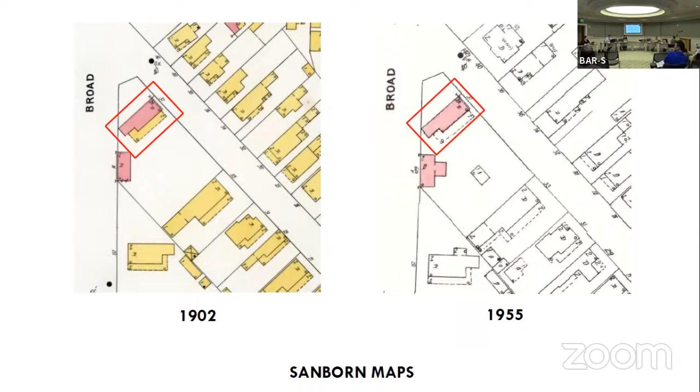And some Sanborn maps showing the history of the structure. We'll turn it over to the applicant.

Good evening, I'm Julie O'Connor. I'm here to do the presentation. After the city shut the project down, Buzz reached out to me and asked me to help navigate the BAR process and do the presentation for him so he didn't have to speak in public. So that is why I'm here.

So Frankie, if while I'm talking you just want to go through the photos, there's no need to worry about that. So the project started with a renovation of the building and a repointing of the brick where the mortar was failing. And as Mr. Morris was doing this work, he realized that there was a significant bow on the front elevation of the house.

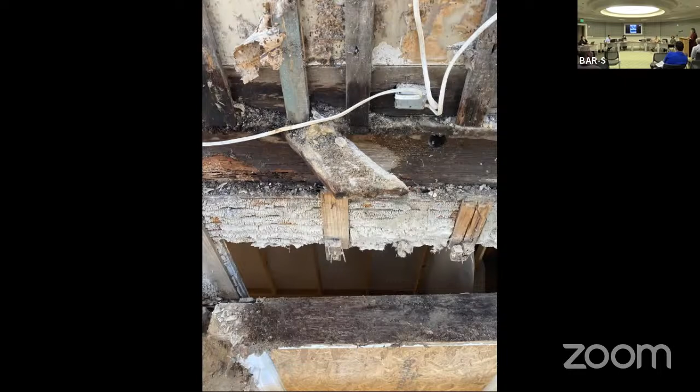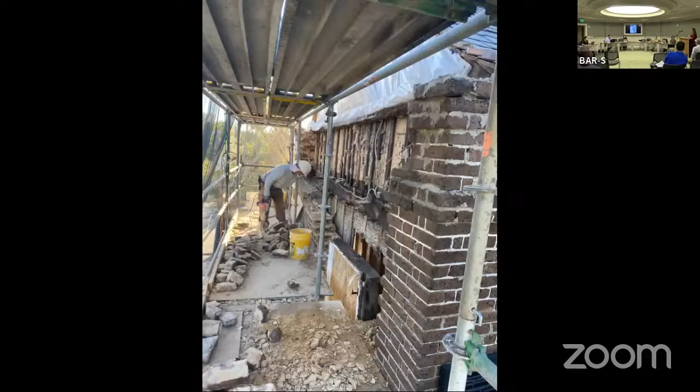And he called Russell Rosen and Ed Fair in to have a look, and they determined that the brick had delaminated and was in significant risk of falling. Buzz got a permit to close down the sidewalk and put up scaffolding, but did not get a BAR permit to take this wall down, and that's why we're here.

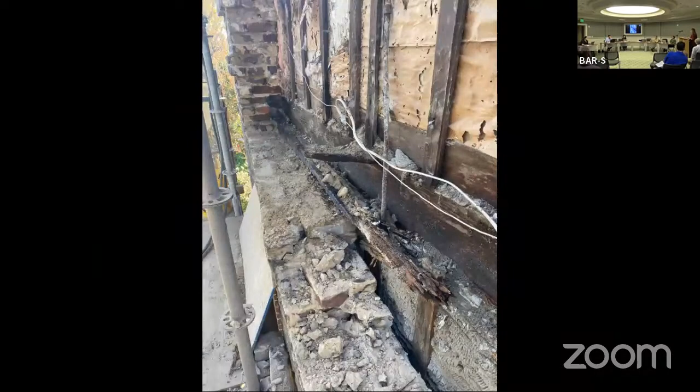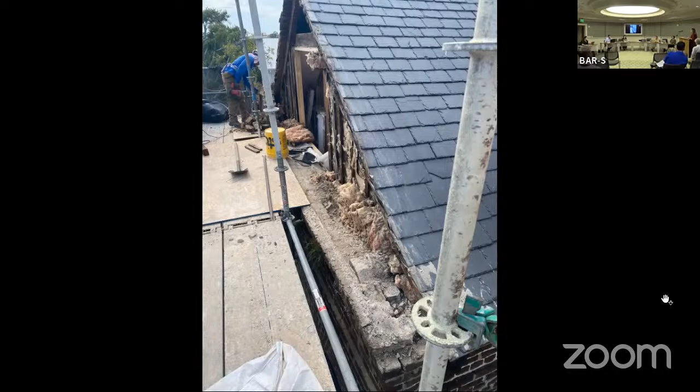So the wall was removed, a masonry wall was built back in its place. Every brick was taken down, and probably about 95% of the brick was able to be saved, and it is stacked on site and being reused as they are rebuilding the exterior of the brick wall.

And those of you that were there today at the site visit this morning, thank you very much for coming. I know that it was great for you to be able to walk up and see everything. And as you noted, about two-thirds of the wall or the brick has been redone. They chose a mortar profile and color that they felt was the closest to the original.

And I know that there was some concern on site with the application of the mortar and perhaps the craftsmanship and the workmanship. So in the meantime, April Wood had given Buzz the name of Up South, and he went to see the great work that they did on the fire station and has decided to contract with them to redo the brickwork and increase the quality of the work there.

So as I said, Buzz Morris is here, as well as Ed Fair, who is the structural engineer, and they would be able to answer any questions, and I will answer them. Thank you. Are there any questions of the applicant from the board?

Block wall, how far does it extend? You saw how far up it extends. Does it extend to the water table? Morris: No, it extends down to the stucco band at the bottom. Yeah, the water table. Okay.

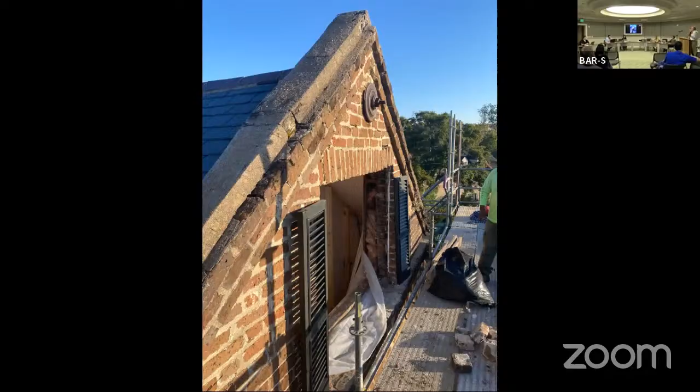And what's the connection between the block? Because I was assuming that water table is three-wythe thick original brick foundation. And what's the connection to the block, to the brick? I submitted a plan from Russell and Ed, a section. Is that in there? So a wall section? Wall section.

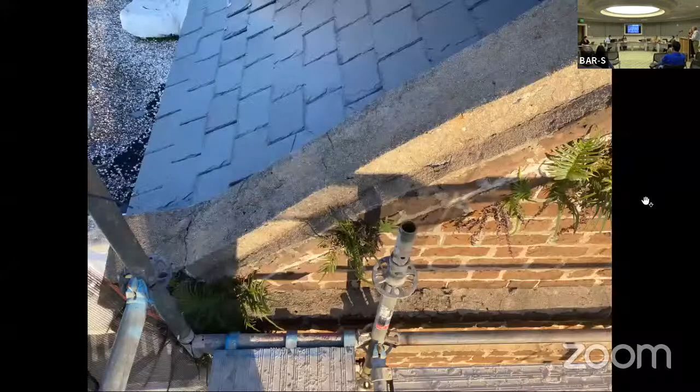It is, if you open the application PDF, like Laura's saying, and you scroll down, the sections are in there. Yeah, it's page 3 of that document. Thank you. Any other board questions?

Or Fillmore, are you following up on that? I had one more, actually two more, at the corner where the block ties into the existing building, because from my observation this morning, the block goes to the corner where it looked like there may have been one or two courses at the corner that was brick.

Yes, a brick. And what's the connection there? We didn't specify anything to connect the block to the brick there. The brick on either corner was in such bad shape that had we epoxied any rebar to it, it wouldn't have held anyway.

That's good, the whole building. And I was just curious as to the sort of thinking process, why use brick and reinforced block instead of rebuilding it in kind.

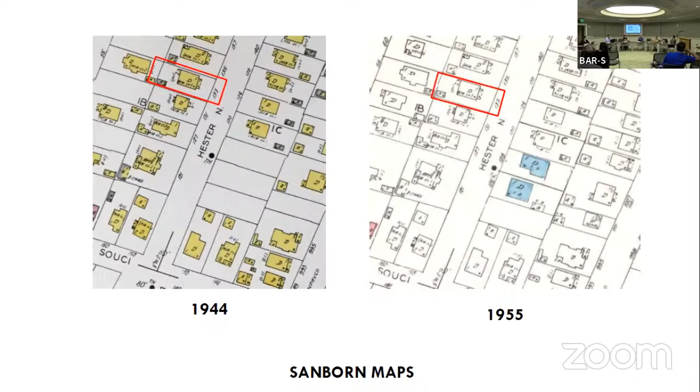Most recent site photo we could find on Google, it does not have the vegetation on it at the moment. Context of Hester. Some Sanborn maps showing the history of the structure. Turn it over to the applicant. Sure, thank you, Chris Potter with Studio Architecture.

153 Hester, obviously I've got a site visit, taking a look. The pictures show it is a relatively simple house. Over the years, it has lost a lot of the character elements that it may once have had.

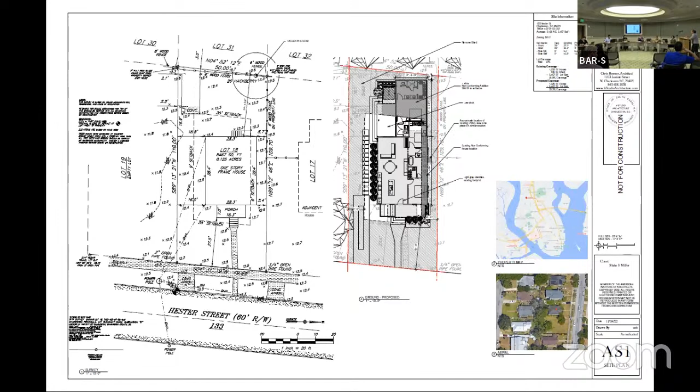Let me go forward to the elevation sheet. This is going right here, I'll go back to the last one. There you go. So a lot of the original items from the house have kind of been lost. We're looking at a black aluminum painted structure for the porch, which clearly wasn't original. It is currently wrapped in vinyl siding with what looks to be asbestos siding underneath that. All the original windows have been removed and replaced with lower quality vinyl windows, as well as layers of security grates too.

The hope is really to bring this house more in keeping with the neighborhood in terms of form, and the hope in doing so is to remove this front porch. We'll be putting back a front porch in a character that is maybe more in line with some of the bungalows that are around the neighborhood.

The property has zoning approval to add an addition to the rear, but the home will stay a one-story home. It will maintain 3 bedrooms as it currently has, and we'll have 2 bathrooms, I think a little better than the existing bathroom. But overall, the form and its contribution to the neighborhood will remain the same. We're just hoping to renovate the home in a manner that gives it some of that character that maybe it never had.

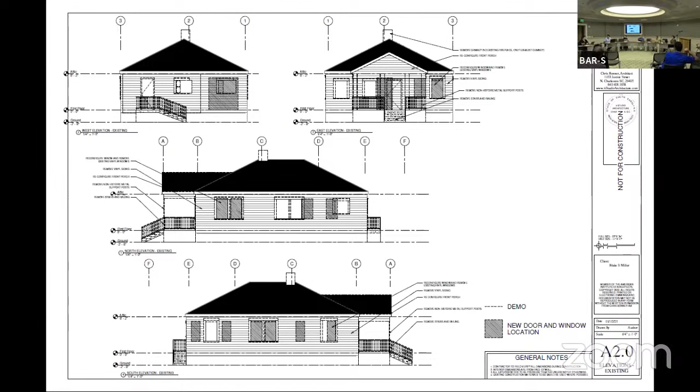Thank you, city staff comments. I apologize, I forgot to correct this staff observation. Staff did observe that the previous siding had been changed to vinyl -- it's not changed vinyl, the vinyl has covered the original asbestos siding.

That's from this morning. Staff comment is that the front porch with its gable roof and the chimney are the few character-defining features that remain and that they should be retained. Our recommendation is for denial of the demolition of porch form and chimney.

Thank you. Would you like to respond to any of the comments? Sure, we have...

The form of this particular part of the neighborhood has a lot of variety, each of the individual homes has a different form. I don't think it's fair to say that this particular porch is in kind with the majority of homes in this area. While there may be one or two other homes with a similar porch configuration, most of them actually have more generous porches. You see a lot of bungalow style homes in this part of town, that leads to a neighborly feeling and atmosphere, a lot of the rhythm of the street.

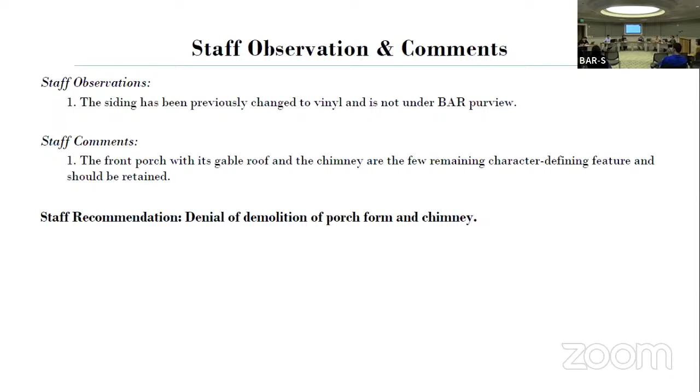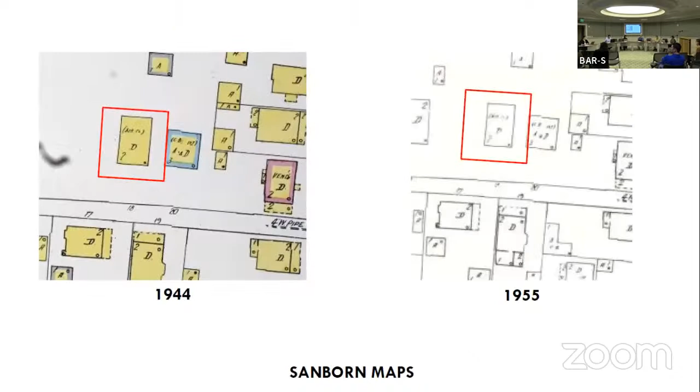Next up is 18 Greenhill Street. 29 Legree is deferred if anybody did not hear that announcement at the beginning. 18 Greenhill Street is requesting conceptual approval of a 2-story rear addition and 1-story covered porch. It is not surveyed in Charleston, circa 1920, in the Old and Historic Districts. Location on Greenhill Street, existing site photos, and a Sanborn map showing the history of the structure. Turn it over to the applicants.

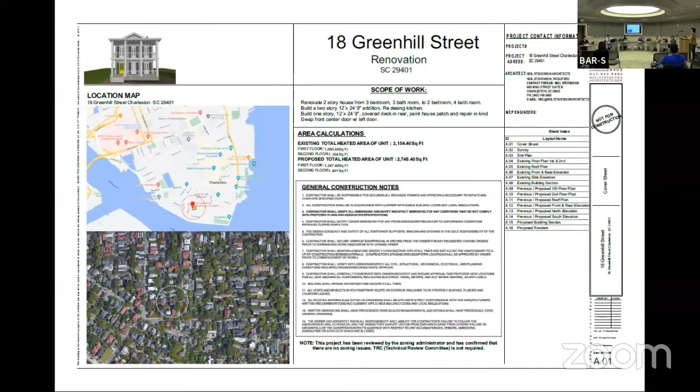I'm Marty, and I'm here presenting this project for Neil Stevenson, who is not able to be here today. This project was last presented to this board in September, and there were several pretty specific comments about the original design, so I think we can quickly run through this.

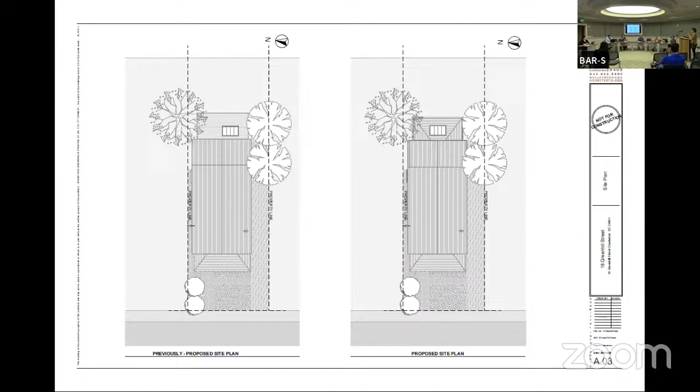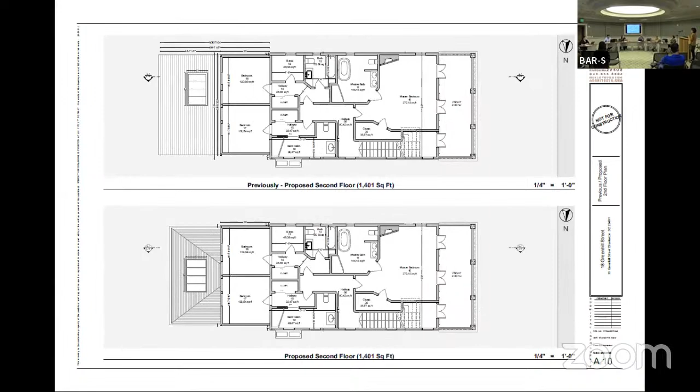So in the previously proposed design, they were proposing to move the front entry door to the center, and there was a comment that the board would like to see it in its original location, so the new proposed has it in its original location. The second and third comments were about differentiating the addition from the original house. To do that, the gable roof of the addition was dropped down, and the siding was changed from the 11-inch cement siding to a 6-inch cementitious siding.

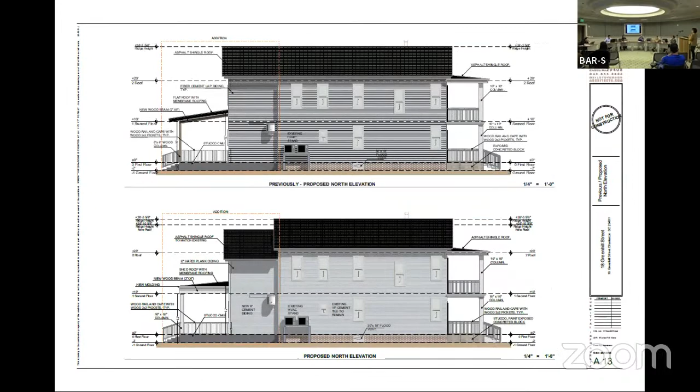You might have the rear on the same sheet - yeah, okay, there we go. The last comment was about the form of the porch. In this proposed addition, the porch now has detail that mimics more closely the detail of the front porch, with a bit of a hipped roof, and the way the trim lines work and the columns. That is my understanding.

Do any of the board members have a question for Rob? Do we have any public comment?

I'm Catherine Carroll of the Preservation Society of Charleston. Upon review of the updated drawings, we appreciate the lower roof height of the addition and the front door remaining in its original location. Our only comment is that ideally we would like to see the width of the addition narrowed, at least on the south elevation, and there should be a greater return before the addition begins. As proposed, the offset between the plane of the historic building and the addition appears minimal, but otherwise we're comfortable with the proposal and thank the applicant for reaching out.

Staff comments? I've just had the observation that previous board and staff comments have been addressed. On the new version, there's some exposed CMU that comments should be painted or stucco. Our recommendation is for conceptual approval with staff comments and final review by staff.

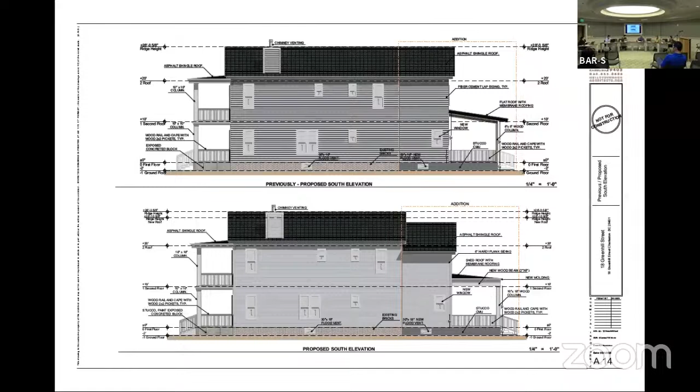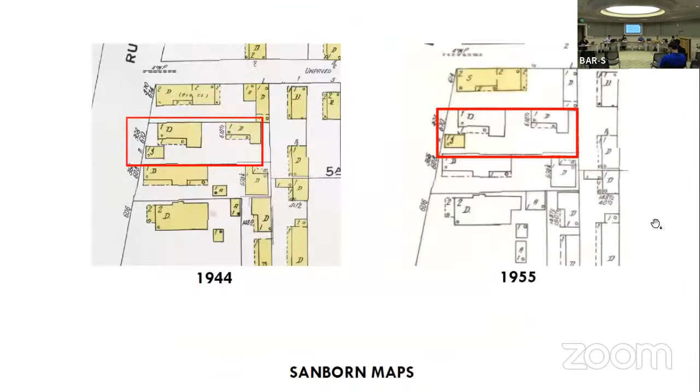Some existing site photos. Text of Rutledge. And a Sanborn map showing the history of the structure. Turn it over to the applicants.

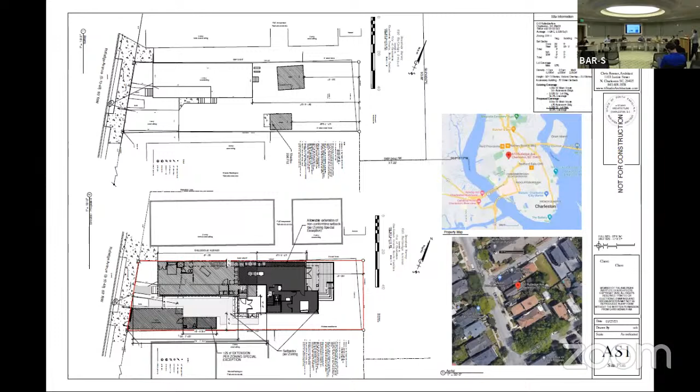Our hope in moving forward with this design was to make sure that we do not create something on the back that looks like an addition tucked in, but really try to separate our addition from the existing structure so that it truly reads as two separate buildings. We want the average passerby to read the two structures as separate buildings, to highlight that we have maintained as much as possible of the historic core of that cottage, and that our addition is something separate, more of its own time on the property.

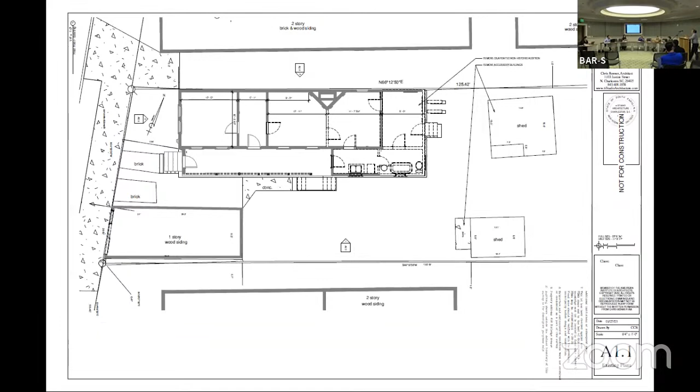Next slide. The existing structures. Next slide. As we add on to it, we're trying to make a clear delineation of the historic core, which is at the left side of the plan towards the front of the property, and our addition to the right.

Obviously it is not a particularly huge lot, and with the small cottage pulled back from the street, our envelope of construction is towards the rear. So we've moved the mass of our addition to the right, to separate it linearly from the historic core cottage.

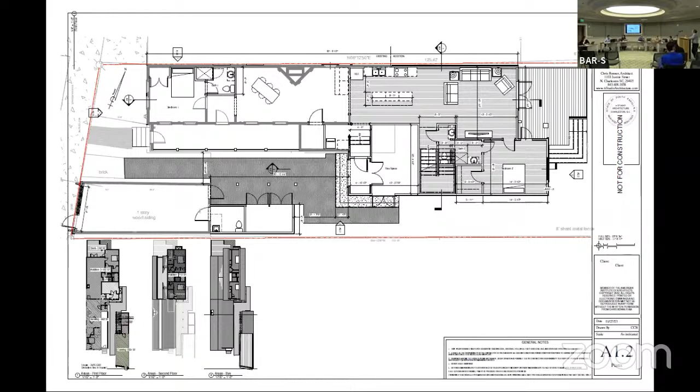Next slide. In addition, there are some poorly constructed rear additions that we're going to take down a portion of to add the new addition. Next slide.

This is basically what we did last time and what we're presenting today currently. Between our last meeting and this meeting, we took some of the comments to heart about really streamlining and simplifying the elevation, what is seen from the street. We had a small balcony that looked into the courtyard space between the two buildings - that's been removed. The fenestrations have been simplified, and all the trim has been unified so it all matches in a particular manner.

We've taken away the square window and made it a bit narrower and taller, to be more in keeping with the city's guidelines. We also looked at changing the roof. There were some comments about the height of the pitch of the roof - it currently matches the historic property. When it was flattened, it ended up, especially in the perspective, looking awfully strange and not in keeping with the existing home. So we have kept the roof slope matching with the current home.

Even though it's much farther back, the addition will be about 65 feet from the street, so it'll be considerably farther back view-wise. Go to the next slide, please.

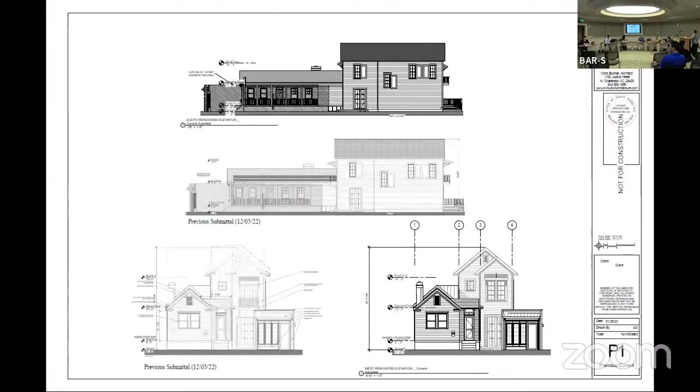On the right-hand side, we're really trying to create a clear demarcation between the existing property and the new construction, so that preservation of the front structure will be obvious and complete. Next slide.

I think really, looking at the front street elevations, which is the small elevation on the bottom of the sheet, we're really looking at creating a separation between the new mass of the addition by shifting it to the right and keeping the left-hand side historic piece of the property where it is, but as separated from the addition as possible.

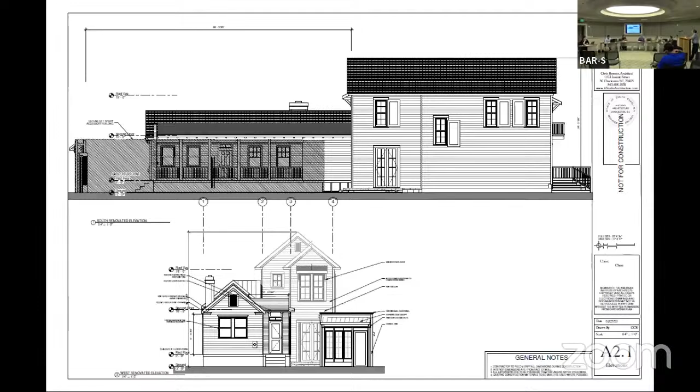Next slide. Next slide. Some sections. Next slide.

Go to the next slide.

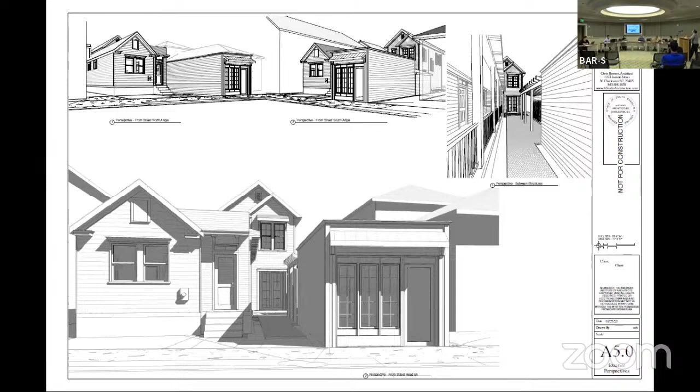Finally, not necessarily that this is the paint color we would use, but the idea is that we can create separation of these two masses through paint color, keeping the historic core a darker tone, and the new work in the rear a lighter but matching tone, so that they don't feel completely separate in color, but there is clearly a separation—different, a break between what is historic, what is existing, and what is new farther back on the property.

I think that's all I have today. Thank you. Are there any questions on that?

Chris, could you just address—I'm looking at the previous motion, number 2, about disengaging the Freedman's Cottage from the new addition and clarifying that distinction. Did anything happen on that front?

I think we looked at it from a physical standpoint, and really the property line side is not visible from any right of way, so any kind of indentation or separation doesn't create a visual effect where anybody can see an actual separation between the properties. And being a relatively small, narrow site, from a site and program standpoint it's inevitably a narrow, deep house, so as you build onto it you only have so much width. Any kind of juxtaposition creates strange situations with waterproofing, so we thought the hope is to separate these buildings as much as possible.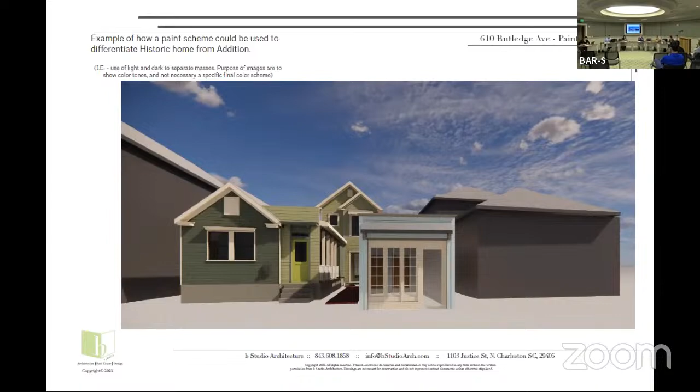Our observation was that for some of the previous comments, details have been simplified. Staff comments provide material information and details, including a wall section. There is also a drawing issue where there's a label for the balcony that was removed from a previous note. Staff recommendation is conceptual approval with deferral for preliminary. Staff is comfortable finalizing preliminary approval during final review if the board is comfortable with that, at which point we would verify wall sections.

Would the applicant like to respond or clarify anything?

We hoped to work between the last submission and this submission to go through as much of the comments and discussion that was able to be heard. Certainly there was some conflicting thoughts, so we did our best to get the overall idea of simplification and making the rear structure less personality into it, I guess.

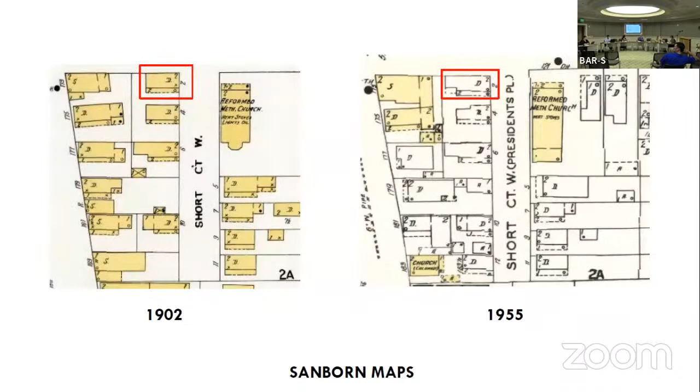Existing site photos, and the context of President Place, and Sanborn map showing the history of the structure. I will turn it over to the applicant. Thank you.

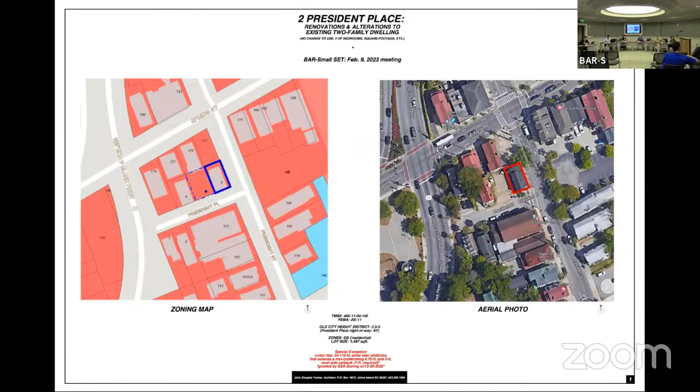I'll try to be brief. In the corner of President Place, more maps, because they're sort of all referenced later. So the house appears on 3 Sanborn maps, starting in 1902, and it shows it's a 2-story structure with what appears to be a 2-story piazza on the west side.

In 1944, same configuration obviously, except there is an addition at the back, and the piazza or porch doesn't say if it's 1 or 2 stories. That piazza is still showing up in 1944, and then 1955 really just the same condition.

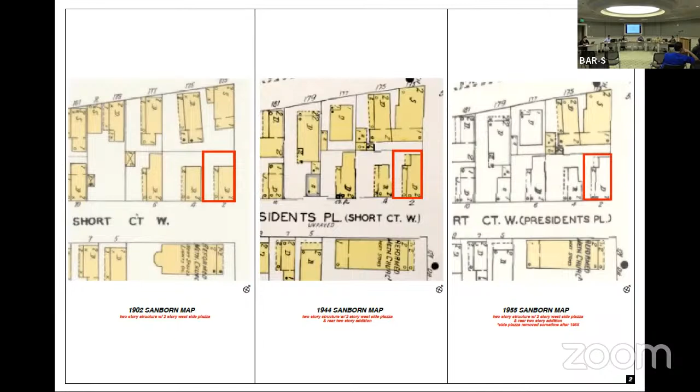Looking northwest in the corner, you'll see in the plans and elevations a same side hall. Also on the west side is a little curious feature, and you'll see the elevation. That's looking back. President Place is a dead end at the crosstown, with something back there. That's the house.

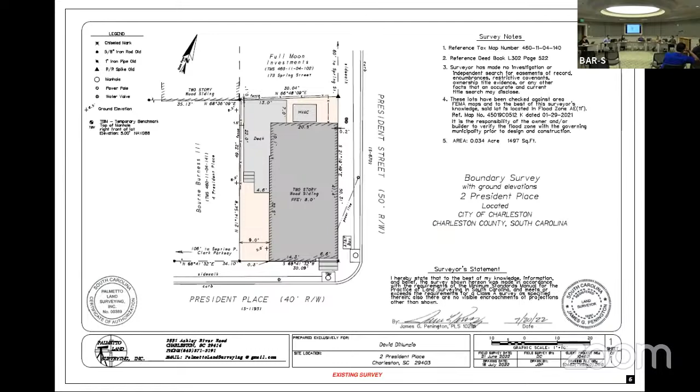Next slide. This is the proposed site plan, which shows the removal of all that deck and HVAC stuff, and the addition of 2 side steps, landings, and wood awnings, and then also rear wood work. I'll show you the plan and elevation. Next, please. That's just an overlay showing what's going away and what's happening with the new configuration. A lot less. That was all for zoning.

Next, please. Okay, so this is existing floor plans, first and second floor. You can see really about the only thing that appears original is this side hall stairway. I don't know if that is masonry, it's a fireplace box, you'll see in the elevation. It's a metal flue coming up.

So there was not a central stairway, but whether there was a central fireplace, I don't know. Or with a side hall, you traditionally have a double parlor with two fireplaces. So there's no way to know that. You can see the plan has been strangely altered. There's a kitchen under the stairs, a winder stair for this back unit.

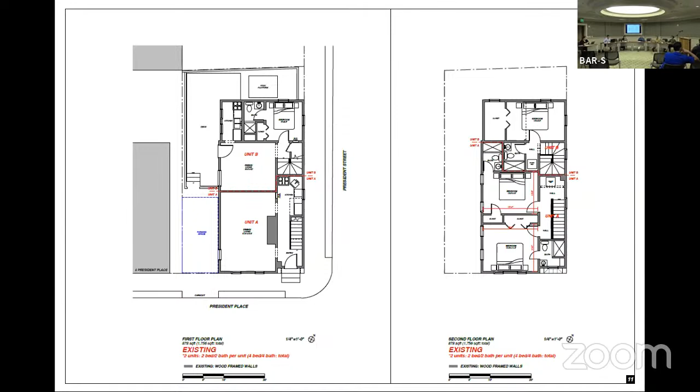I won't go over the plan, but we can reference back to it based on the proposed elevations. We keep the front and rear units as two stories, and I cleaned up, keeping the original stairway, but the biggest move is to maintain that entrance in Unit A.

And then proposing a nicer way to enter into Unit B with a new pedestrian gate at the rear, and these two side doors with stairways.

This is a corner building - not such a busy street, but a corner building with very limited outdoor space. The idea in this conceptual site plan is at least to give these two units a little bit of something outside, so that's the idea of side stairways, and you'll see from the elevation, second floor plan.

So finally getting to what we're proposing. President Street, east side, no changes to the elevation - obviously there's been some window things happening, who knows when. We're just removing that metal going away, and some plastic shutters that are pinned up that we're going to get rid of. And then here's the main elevation, west elevation, with the picture window, doorway, and awning.

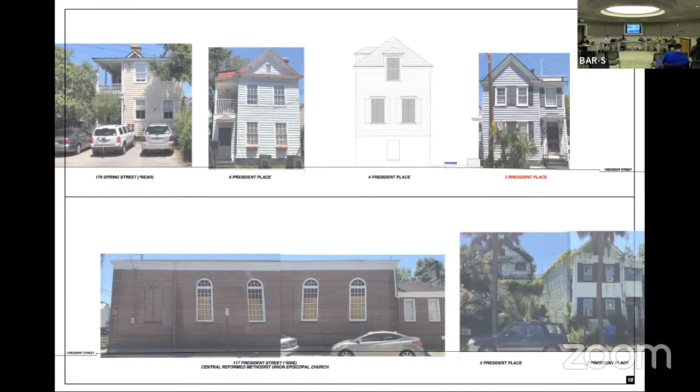Next slide's the final one. So that's just showing construction - over each door there's three of them, and then stairways.

Thank you. Are there any questions of the applicant? Is there any public comment? Hearing none, we will move on to staff comments.

Staff had an observation that we think the proposal brings a lot of order to the chaos that is currently the west elevation, so we wanted to implement that. As far as comments, staff recommends adding brackets to visually support the new entry awnings, providing height and material of the proposed retaining wall at the west and north, and we want the applicant to confirm the status of a large tree that appears to conflict with the side wall, gate, and lead walk to President Street, and to make sure zoning approval has been obtained. Other than that, we are recommending conceptual approval with staff comments and final review by staff.

Thank you. Mr. Becker, would you like to clarify or respond to these comments? Oh sure, briefly - you're not obligated to. Oh, I know, but I'll be brief.

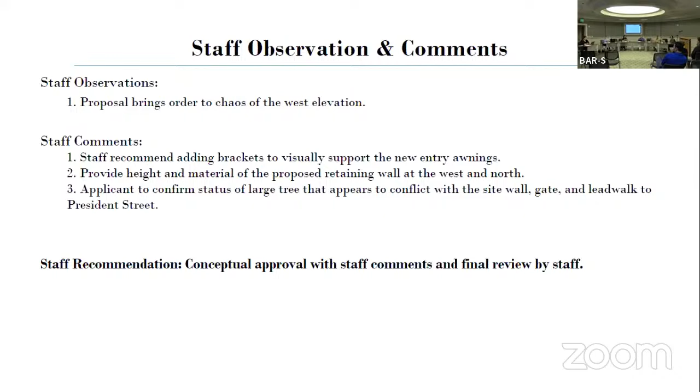So I'll look at the brackets. We thought we will need to go back to the elevations - I sort of felt like the entry door surround is sort of the one that should be the most... could go back to that front elevation, that would be nice.

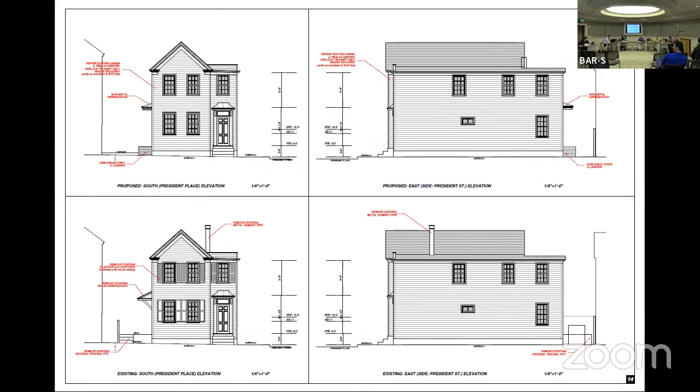So there are - maybe the photos would show it better too - but there's sort of like raster brackets, or medallions is what I used to call them. But there's some brackets at the front and a more detailed door surround, and I thought just the simple cantilever awning would suffice, but I'll look into it - maybe there's a way to do it minimized.

Now I've lost number 2 and number 3. I know about the tree - we have the owner here. I believe you have the approval. That's a nice big tree, and it's been approved, probably. We just couldn't track down any of the people from zoning that were approving trees, so we hadn't been able to verify that ourselves.

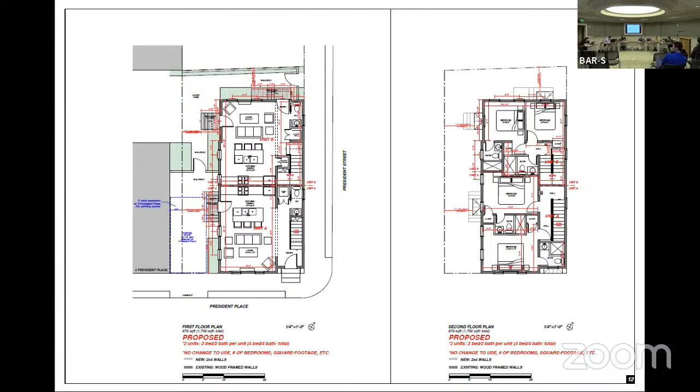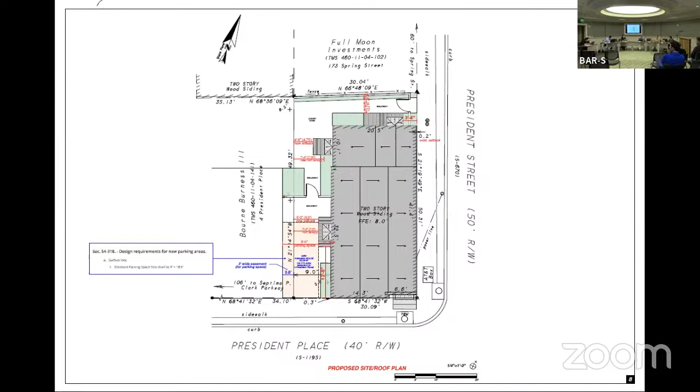What was number 2? Height and material of the proposed retaining wall at the west and north. Lori had a note that there was a proposed retaining wall. I'm not sure what she saw on this, so I apologize. We'll have some proposed fencing that we hope we can deal with staff on. Typically we don't have any retaining walls. Sure, she was talking about that one.

Thank you. We will now enter board discussion.

I had some questions earlier, but the applicant answered all of them. I think it looks good, makes a lot of sense, and personally I don't have any problem with there not being brackets on the new canopies. Somehow my eye might want to pull them down so that they're resting on the casing of the door rather than having a piece of siding between them, but that's just a minor suggestion.

That's all I got. I don't really have anything to add. I agree with Julia. I think that if they come down a little bit so they don't look like they're floating, they don't need brackets. They look fine, simple, just like they are - except maybe lower them down a little. I'd be happy with that. I thought we needed brackets at first, but I like the explanation of the reasoning behind not having brackets.

Yeah, it looks like a good thing - you're working with the pattern of the fenestration on that west side. You're sort of continuing it and reestablishing it, it almost appears, so that's very positive.

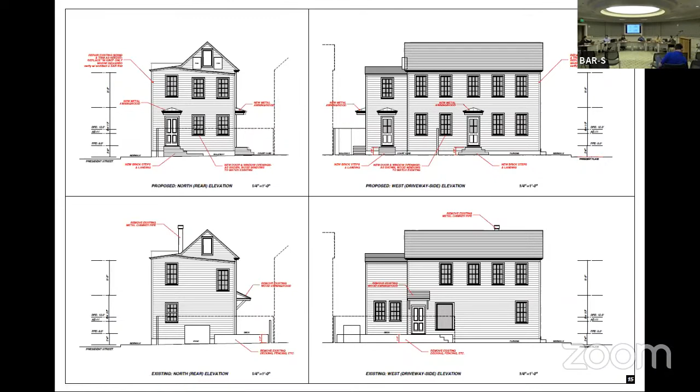Next item on the agenda will be 213 Lime Street. 213 Lime is requesting approval for 15 solar panels. It is not surveyed on the west side, circa 2018 district. Here's the location online, existing site photo, in context of Lime Street, and Sanborn maps showing things there in 1955.

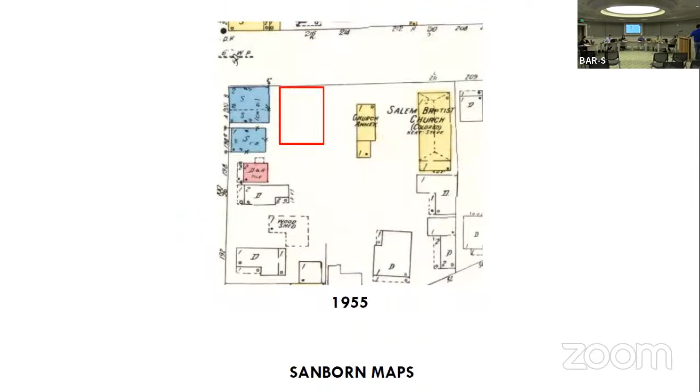My name is John Roeck, R-O-E-C-K, with ADT Solar. Full disclosure, I'm not an engineer, I'm not an architect, not the representative today, so I'll try to answer any questions you have regarding this project. I do know the house was built in 2018. We're going to be adding 15 solar panels for the homeowner, with the majority of the panels facing westerly and 4 on the east side.

Okay. Thank you. Are there any questions for that?

It looks to me like there are 2 different size modules proposed. Am I seeing that wrong? There's only one that has a specification. I feel like it's 41 by 67 or something, but it looks like there's one that's more narrow. They should not be, they roughly should be like 40 by 6 foot.

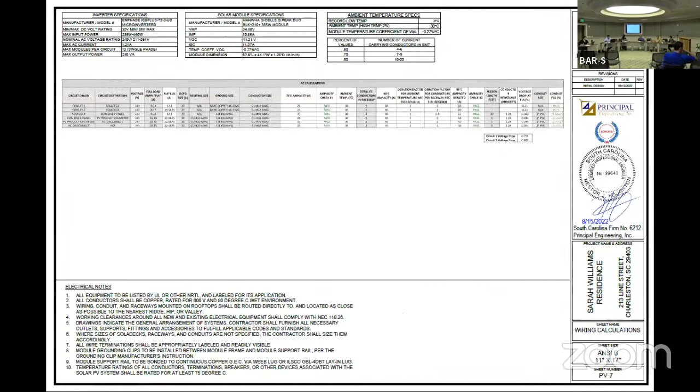Staff observations. Per BAR's solar policy, solar collectors proposed to be installed on new construction shall be permitted, but BAR shall have purview over placement and size of such solar collectors for potential negative impact to character of neighborhood. The existing structure is new construction and was completed in 2018. While it's not on the corner, the lot is owned by the city and we are being told it will most likely remain vacant.

This makes the roof and the proposed solar panels highly visible. This corner is a gateway to the old city district, and as proposed, all service for these solar panels are next to the electric meter at the front corner of the house and are very visible. Staff comments: this house is a newer contemporary design. Panels may not be detrimental to the clean, pure style of the house, but there is concern that the high level of visibility is detrimental to the character of the neighborhood, including Harmon Field, which is across the street, diagonally.

We have concerns about detriment to the character of the house. As this is a relatively newer project type review, staff would benefit from further discussion by the board on appropriate installation locations. If approved, all conditions of solar policy related to installation shall be incorporated, and mechanical services at the front corner of the house should be screened. Staff recommendation is currently denied.

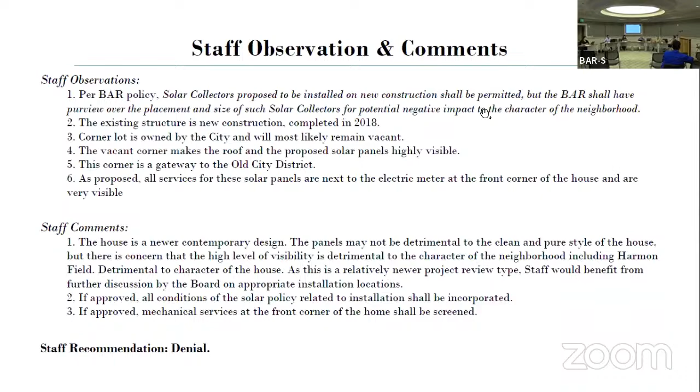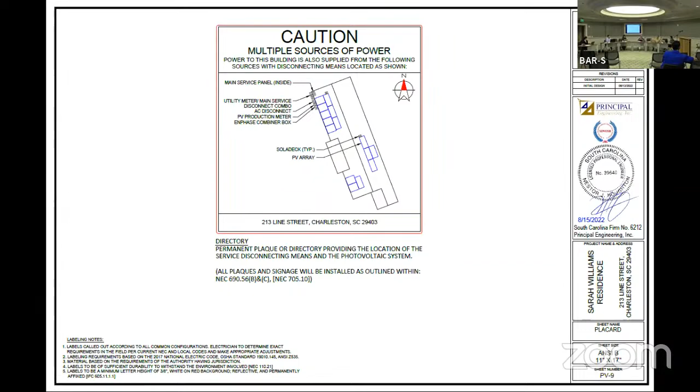I really wish there could be consideration—I understand where the meter base currently is—but I really wish the panels could be pushed to the south, to free up visibility of the roof on the northwest corner, which is the most visible, I think, to the city's point about the visibility of that.

Away from Line Street, kind of push them back. I mean, it appears to me that the property on the corner is related to drainage tunnels and so forth, and it probably will remain vacant forever, because the flooding isn't going away.

I think if there's a way to consolidate and push the panels further to the south, as opposed to breaking them up into two different groupings, it would be really beneficial, and to me would exemplify a good opportunity to put a relatively large grouping of panels on the newer house. Does that make sense?

I have no problem seeing them—no problem. I think there's something to be, well, not necessarily celebrated, but not to be ashamed of. Well, they definitely wouldn't be invisible. I'm just thinking it would be nice to push them into one grouping instead of two groupings—technically three, but two groupings on that west-facing facade.

Is there a rendering of this at one point, maybe in a previous application that wasn't actually submitted? Was there a rendering of how it looked on the exterior?

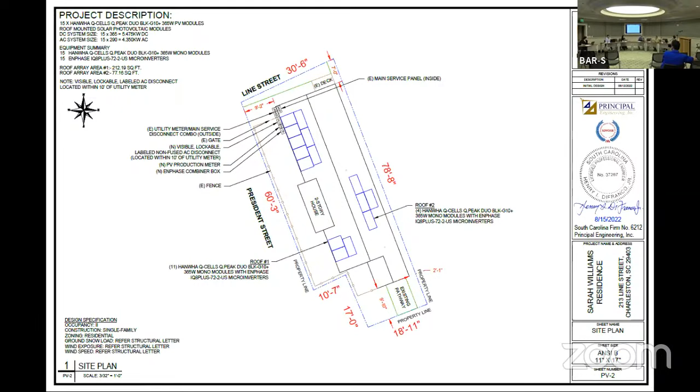This was submitted before, it just got deferred—yes, it was submitted before and it got deferred. I thought this was the same presentation. It probably is, I'm just imagining something.

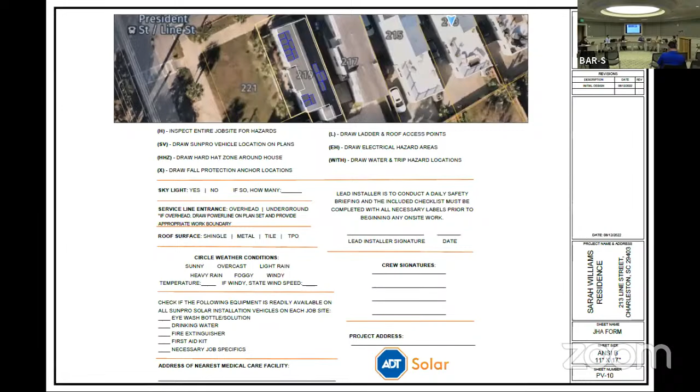So I'm just saying, if you could do all of that—there's a pitch change right there, but you could go straight across and have that lower rung right there.

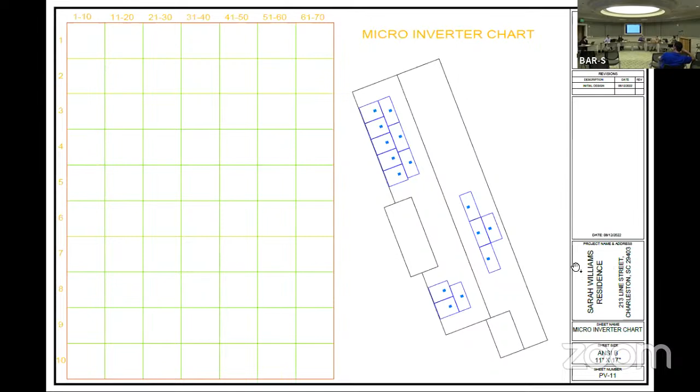Frankie, are you able to pull up the Google Street View? Yes, sir. I'm not sure what protocol is, but I could pass it around and answer that question. Okay, cool. Just for the sake of the public meeting, go ahead and pass it around to the board, but I'm going to pull it up on the screen.

These little white squares represent areas where they can live. If you're proposing to put them all back here, that's a spot where they could live—see, I can just add them right there with my finger. I know I moved too far back. If you're proposing here, hopefully that better answers your question about how they would look out there.

Oh okay, how does that work for you guys? Technology prevents us from putting it in this area because you've got a bit of a porch up there. Yeah, that's original, that's all that jazz. So this would be enough to satisfy relocating more of them over there.

Yeah, this was a better spot for production. Is that what you wanted? Yeah, are you able to just rotate around? I think this may help you as well. If I move too much it goes to an older elevation. Okay, no, that's fine.

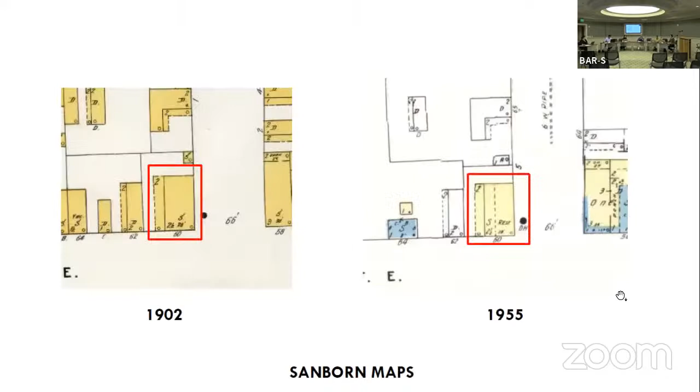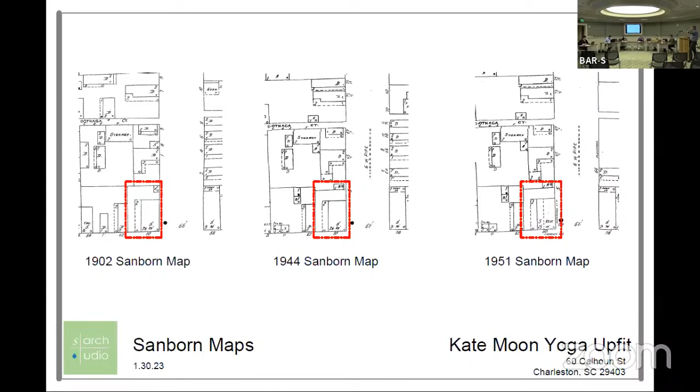Thank you. I'm John Sullivan, Sarch Studio, representing the applicant. This is a very minor alteration to the building, concentrated on the west side. It used to be a piazza, now infilled. The first floor is CMU, with a picture window further down. The plan is to remove that picture window, make a double door, and the west side is a dirt parking area, not currently used for parking, but we're keeping a potential parking spot there. There will be new pavers and landscaping to get to that ADA entry. We're adding 2 courses to the remains of a CMU wall, and there's a walkway next to it for the library that goes back to Little Park, about a foot or so higher. We're just raising that wall 16 inches and stopping there.

With that, any questions? Do you want me to pull up? You can, right there, you see the picture. That picture window is what we're taking out and making a double door beside that, in back.

Any questions of Mr. Sullivan? Thank you. Is there any public comment? And staff comments? Staff had two observations: the alterations are minimally visible between the two structures, and while the work is considered sensitive and minor, staff does not find the policy statement for staff reviews applicable, which is why we brought it to the board tonight. Staff recommendation is for conceptual approval with final review by staff. Mr. Sullivan, I'm guessing you probably don't have any rebuttal to that. Thank you. Board discussion.

Glad they have a little alleyway over there to do it. I'll go ahead and make a motion for conceptual approval with final review by staff. Thank you, Bill. Do we have a second? I'll second that. Second by Laura. All in favor? Aye. A vote with majority. Thank you.

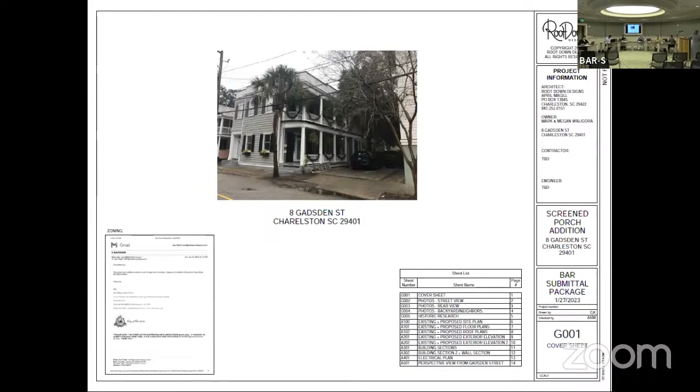I'm April Magill, the architect of Root Down Designs, representing my clients at 8 Gadsden. They are wanting to build a rear addition of a screen porch, and if you scroll to the Sanborn maps.

We believe the original structure was separated from your structure originally. It seems like the piazza turned in the corner and there was a separation. Then the space was joined later, which seems like you guys found a Sanborn map that we couldn't find, from 1955. So the proposed addition is...

So currently there is existing decking on the rear part of the structure, in the same general vicinity of where we have the proposed screen porch addition. The decking is currently 2 different levels and has some railings on it.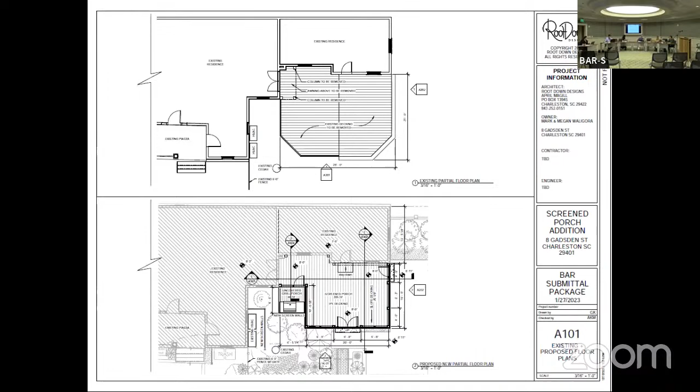And if you would please scroll to the elevation. We really tried to be as sensitive as we could to the existing structures. This rear building back here is quite low in height, but we really tried to design the screen porch so that we didn't want to exceed the height of the existing structure. We feel that it's appropriate in terms of height, scale, and mass, and we received support from our local preservation groups and other community stakeholders.

We have provided more detail in the package than what's required for conceptual approval. We're hoping that since it's a rear addition, accessory structure, non-controversial, at least as far as we have heard, that we could shoot for final approval with staff comments just to expedite it, but yeah. Are there any questions?

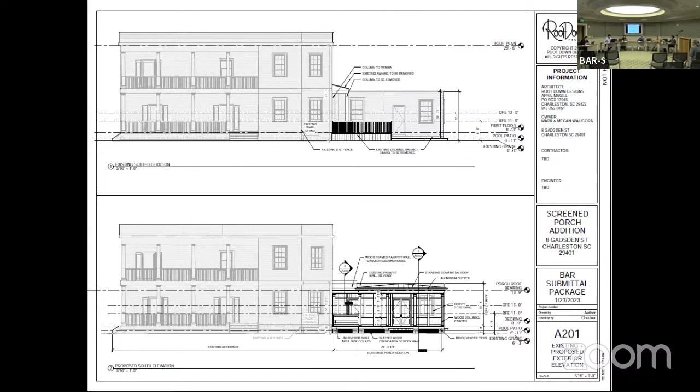On the final page is a perspective view from the street from the line. Quite minimal because there's a privacy fence, and then the existing cedar tree is there as well, so the amount that will be visible from the sidewalk is minimal.

Called out for a standing seam metal roof. Have you decided what that's going to be, what metal roof? We did not specify the actual metal, but specified the color. It's got aluminum gutters, so I'm assuming it's going to be galvanized.

Any other questions? Thank you. Is there any public comment? Okay, hearing none, we'll move on to city staff.

Staff observations: the proposed addition is subordinate and differentiated from the existing house, and the screen porch addition is minimally visible. Staff comments: we request the applicant provide the column width and suggest thickening them slightly. Suggest centering the screen framing on the center of the column to give visual dimension to the column. Extend the porch floor to make the skirt board sit just beyond the brick foundation piers, and suggest painting the columns and screen framing white to coordinate with the house. We are recommending conceptual approval with a final review by staff.

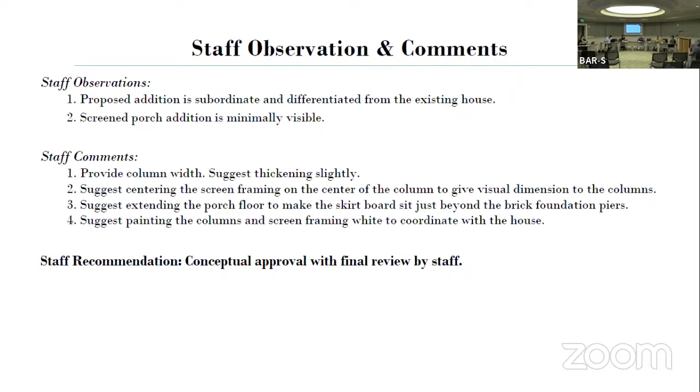Requesting approval to replace 13 6/6 windows with 2/2 wood simulated divided light windows. The property is not surveyed in Harleston Village, circa 1800, in the old and historic district.

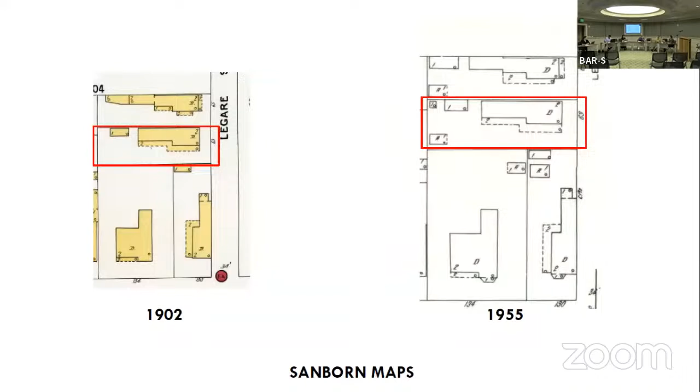This is the existing location on Legare Street. Existing site photos, some context of Legare, and Sanborn maps showing the history of the structure. I'll turn it over to the applicant.

We need to replace 13 windows in the back of the house that are rotting. They're actually simulated divided light windows now, and they look like they were done probably in the mid-2000s, so like 2005, 2006 when the house was redone. They're all rotting, the sills are all rotting. They're single pane simulated divided light 6/6.

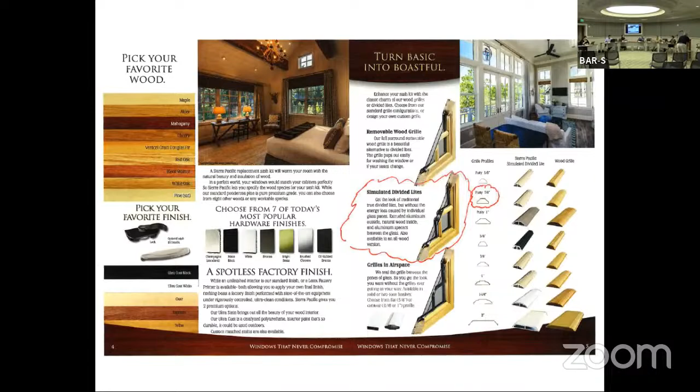We're looking to replace them with windows that look like the other windows in front of the house, which are 2/2. If you go back a little bit to the house and zoom in on the front, you can see there are 2/2 windows. Those are also, you'll see on the side, a side view going down to the neighbor's driveway. We have 2/2 in the front here, and we're looking to replace just some of these windows in the back.

You've got one where they're circled. There are windows in the back of the house, and there's windows on the back section of the other house that's stepped back. This would be what we would replace them with - double pane simulated.

Are there any questions? Is that clad with aluminum? What am I looking at? This is aluminum clad, yeah.

Is there anything that shows a better view of the existing windows? About the street view, definitely 2/2 across the front. I went by there, and as far as I could see down the side and across the front, they were all 2/2s. You can see the back, of course.

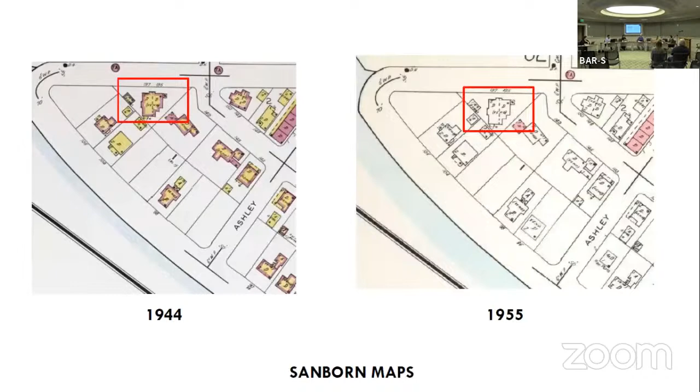Good evening, everybody. My name is Jodi Crosby. I'm with Crosby Creations. I feel like I'm too short for this. Glad to be here and glad to be able to bid you guys good night after this.

I wanted to open up with stating that this house was originally built in 1930 as a multifamily home. It is believed that the CSS David submarine is buried under the home. I do have a letter of support that I will submit to staff that was just received yesterday by the homeowner.

This is from the homeowner of 190 Tradd Street, across the street from 195. It says, hi Chris, we're trick-or-treating neighbors from across the street. We have had a chance to look over your plan for 195 Tradd, and since we will be unable to attend the BAR meeting, I just wanted you to know that we fully support what you are planning. From our vantage point, it will be quite an improvement. Hope to see you soon in the hood. Back to you.

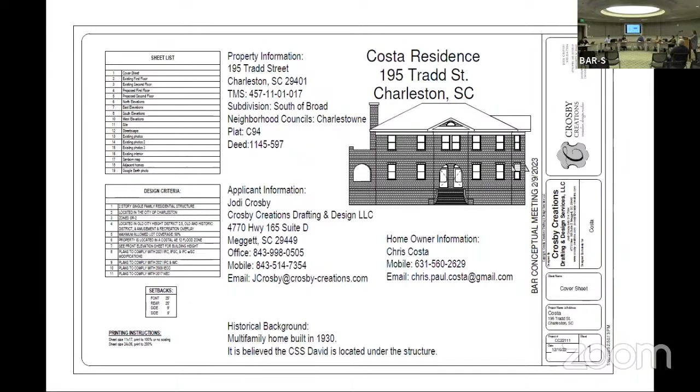So I'm just going to go elevation by elevation. I know that our application didn't have a lot of explanation, I apologize for that. The north elevation changes: I wanted to note that in some of the photographs, and even in our north elevation drawings, it doesn't show that the two front entry doors have true divided lights in a prairie grid fashion, but they are there, they're existing. There were some screen doors over those doors, so that's why those aren't illustrated properly.

The desire is to replace the windows on this elevation with prairie style simulated divided lights, which the actual grid style also matches 150 South Battery. They are wanting to add panel operable shutters with dogs, shutters to be painted with Benjamin Moore HC 190 black.

On the east elevation, they are looking to replace the windows with the same style windows as the north elevation. They are removing two doors on the southeastern side and removing the brick steps that go up to one of those doors. They'd like to add a new arched window located over their master tub. South elevation changes.

They are removing the sliding glass door and replacing the majority of the windows. There are some awning windows up top that they're going to keep in place.

West elevation changes include replacing windows, adding two new windows, and adding a new door to match the prairie style lights, and adding a new roughly 8x7 uncovered landing at the door with his and her stairs going south and north.

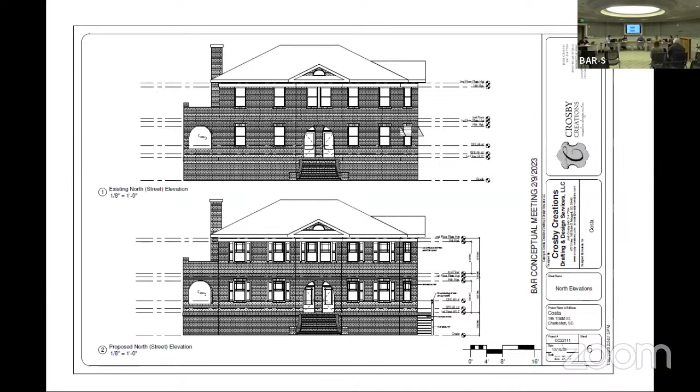There's a new stair on the west side. It just indicates pressure treated 2x4 material. Is that what you're thinking over there? Yes, pressure treated, and then it'll be painted black, in one.

Is there any public comment?

I'm Catherine Carroll with the Preservation Society of Charleston. Similar to the previous request, it was difficult to understand the age and condition of the windows proposed for replacement and the justification for this proposal.

It was new information that there was prairie style influence being derived from the doorway. That would be interesting to explore, but we still feel there should be more information provided.

The Secretary of the Interior's Standards for the Treatment of Historic Properties specifically advise against conjectural changes that create a false sense of historical development. Thus, without photographic or documentary evidence that this house would have had decorative window sashes as proposed, we're not in support.

We also didn't realize that the windows proposed were to be simulated divided light, similar to the last proposal. Windows on historic buildings should be authentic wood, true divided lights, and proposed simulated divided lights are not appropriate for this area. Thank you.

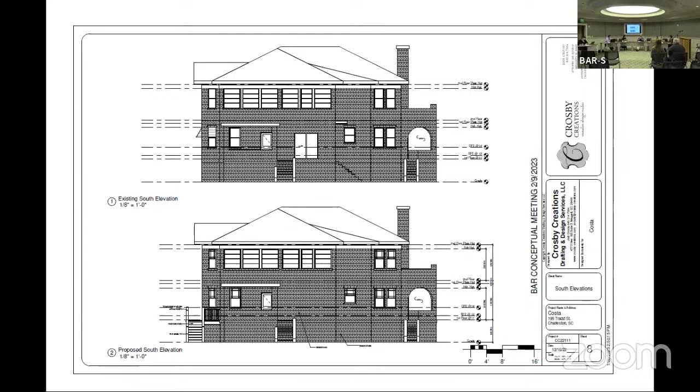Any other? The staff will have staff comments now.

Staff didn't receive any historic documentation regarding the windows and whether the prairie style existed on the house, so the comment is that prairie style windows would be inappropriate for the location and age of the structure if they're not original to the house.

We recommended omitting the shutters on the center second story pair of windows. If they are bifold shutters and operable, we would strike that comment.

Thank you. So now if Jody, if you'd like to respond to that.

I guess the question is, the homeowners are very, very willing to work within the guidelines. Would they have to go through the process of a window survey if they were to replace the windows with no divided lights with windows?

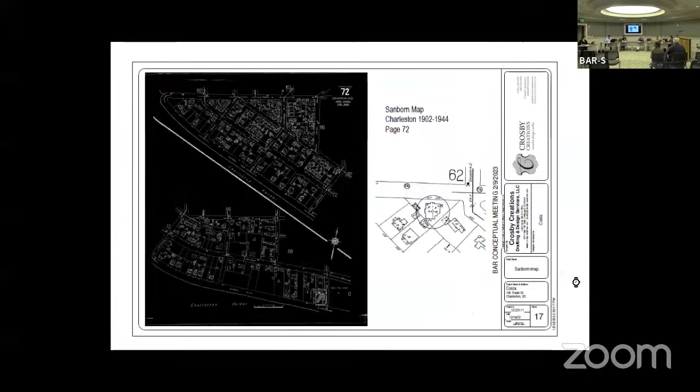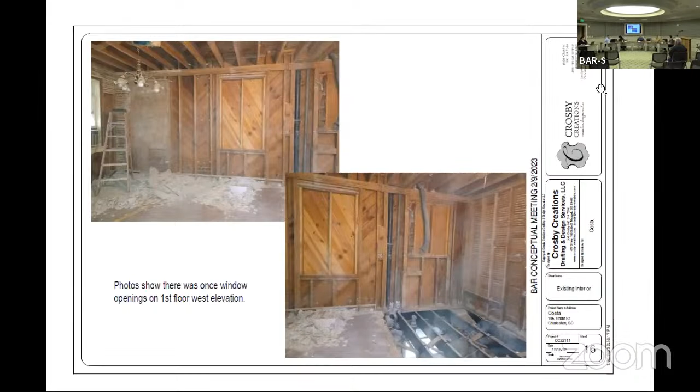I think the windows are